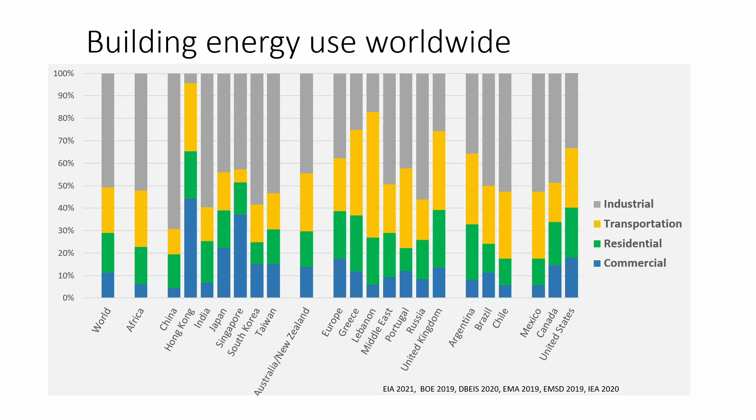But it varies depending on whether industry is dominating or whether it's moved away from industry and into more of service. In the US, we're kind of typical for what's going on. If we look at it from different parts, about half residential, half commercial in the US. Before the 2008 downturn, it looked like commercial was going to overtake residential, but that hasn't happened. Everywhere I go, there's still quite a few empty commercial spaces. This is still 15 years later after that recession.

But it's still there. If we wound the clock back to the 60s in the US, industry would be well over half of our energy. Residential and commercial didn't get to be this large until the last 20 years or so. That's where the growth has been. Transportation is pretty steady, about a quarter of the energy. The CAFE standards really make sure that our cars and trucks are efficient, and that's really had an impact.

I'm looking forward to seeing how this changes as EVs begin to make an impact. Where I live in Washington, D.C., EVs are now 15 or 20% of sales. It's just amazing the change in just a few years. It used to be up and down my street, it was all hybrids. Now it's all EVs.

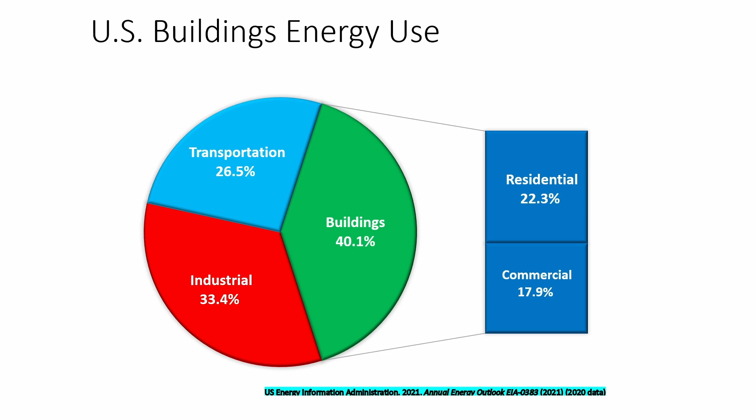So it is kind of interesting to see that change happening. The city encourages that. You don't pay any tax when you buy an EV in the district, which is worth a few thousand dollars. So they are encouraging that as well. Let me get this open.

This slide shows that what we traditionally think of our homes as far as energy use, the heating, water heating, cooling, appliances, cooking, things like that, are still there. But there are a lot of other things going on. In fact, a full quarter of our energy use now is other uses, all the little stuff that has crept into our lives.

I have almost 25-year-old twins, their birthday is next week. When they're home, I wonder why my Wi-Fi is really slow. Go on the router, there's 17 devices connected, all drawing these little bits of power. Even computers are now showing up in our residences at 1%.

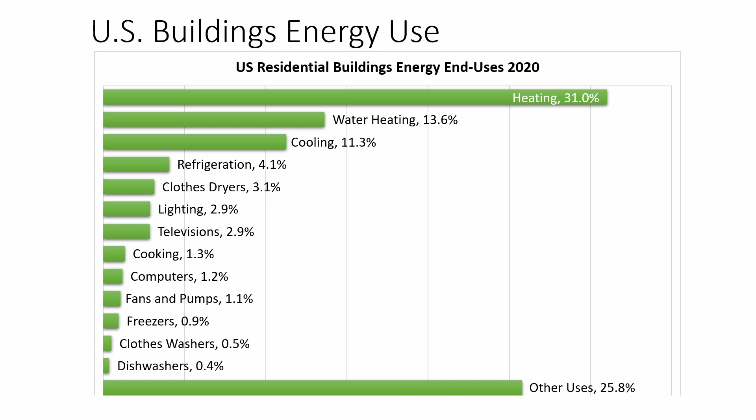So if we're going to deal with this, we have to deal not just with the top things, which is really what our energy codes deal with. We've got to deal with a whole spectrum of energy use in the buildings.

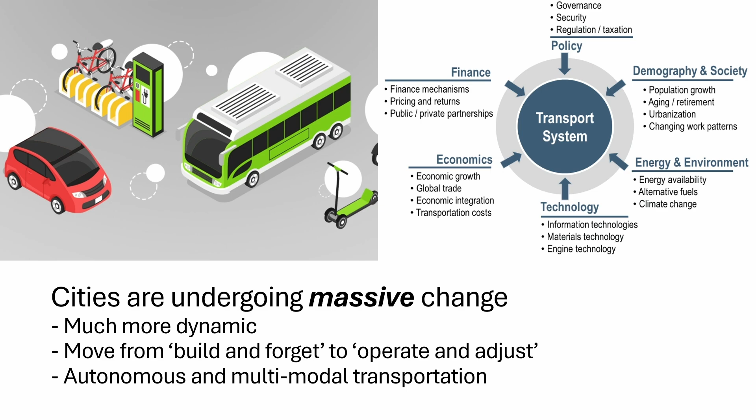We're seeing massive change happening today. You're seeing much more dynamic, much more interactive. People are trying to draw people back into the city. In Washington, D.C., a lot of office buildings are already being converted to apartments because they're empty - people don't go to them like we did just 5 years ago. Making that more interesting for people to live in, having them come to the city, has really been getting there.

Multimodal transportation - there are bikes and scooters littering my neighborhood. There are 3 different groups doing it, and whenever they run out of power, they just leave them wherever they are. But that sort of change, where we now have dedicated bicycle lanes throughout Washington, is happening in many places, and I think that's making them more attractive to live in instead of being so car-based.

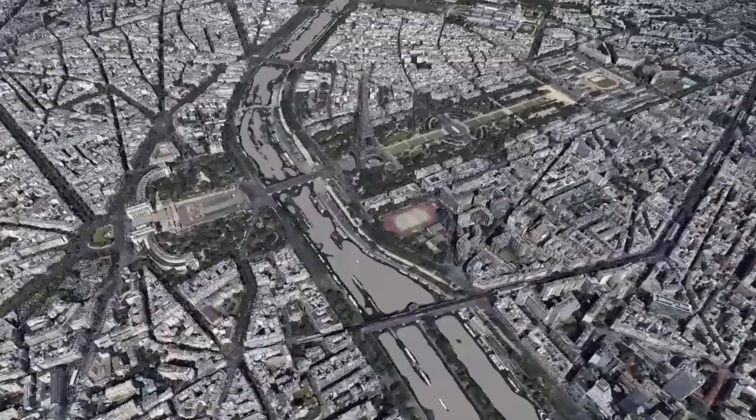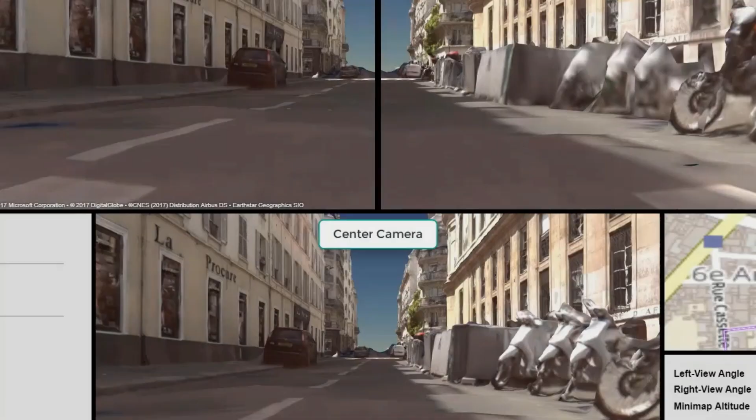This is Paris, where the Olympics were a couple months ago and the Paralympics recently. This is a model created by flying a small airplane over the city and taking tens of thousands of photos. Using a process called photogrammetry, that's converted into a model. Depending on how many photos, you can get incredibly accurate results down to a few centimeters or inches. This is the sort of thing you'd see from the Google cameras that drive through the city, but in places where there aren't many pictures, you get kind of weird stuff.

What this means is we can now capture an existing building pretty easily. That's kind of a cool thing. Photogrammetry has been around for decades - I have a book written in Serbian by someone who actually invented photogrammetry, maybe 100 years ago. So it's not anything new, but the power of it and the ability to create an image of Paris in a few weeks of computational time is really incredible and possible today.

And it's not a single source - you don't have to just take the helicopter or the plane and take pictures. You can do it from the street, however way you want to do it, in different ways. They can be point clouds as well, or reality mesh, which is what I was just showing you, 360 images, even obliques capturing that data. So it's a way of capturing many pieces there.

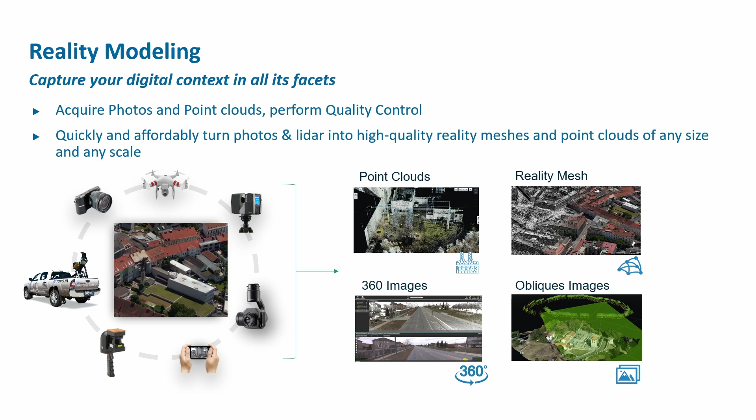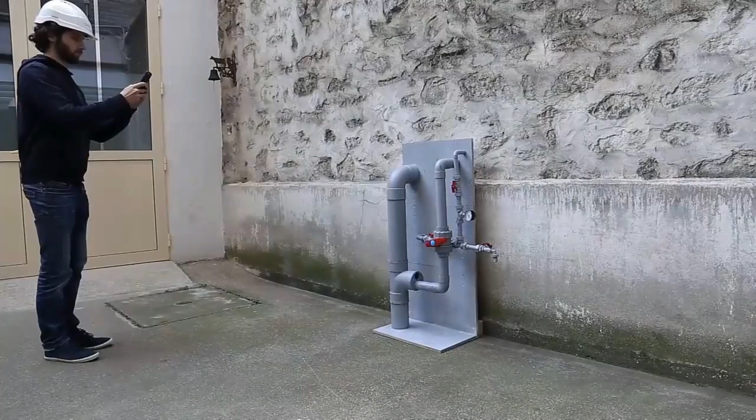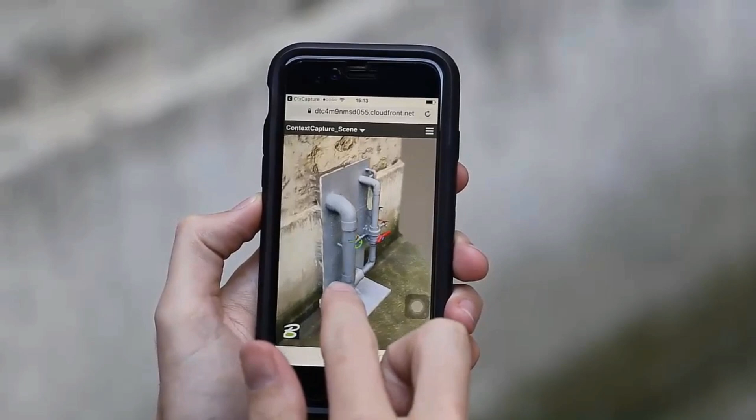LiDAR is one of the most powerful possibilities of adding this in, because with LiDAR you can get down to millimeter accuracy. Here's an example: a colleague using one of our apps on a piece of plastic pushed together, not a true pipe. He sends a bunch of pictures up to the cloud, as long as they have at least 50% overlap, and you get it back. You can take measurements off that - it's that accurate. That's one of the key cool things it's been able to do.

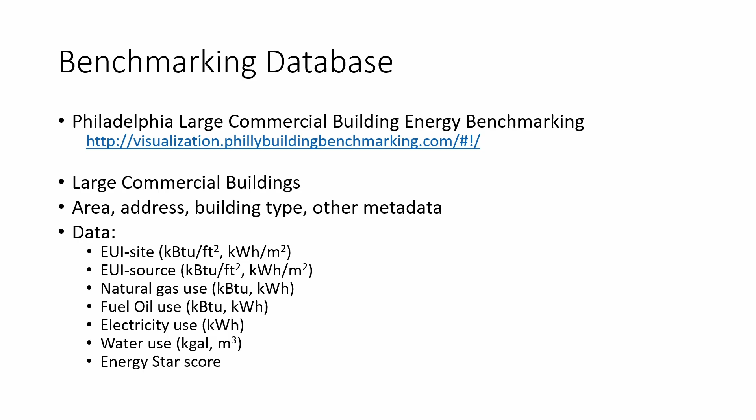Philadelphia, like Chicago and many others, has been doing building benchmarking for over a decade, requiring building owners to submit their energy and water bills and other information. For Philadelphia this looks like a database where you can get information about energy use. You can do the same thing in Chicago for various buildings, depending on the city, for buildings 50,000 square feet or larger. Some of this has been overtaken by building performance standard work, but it's still ongoing. If you look at Philly, their database is just kind of a flat file available online, but it has a lot of information.

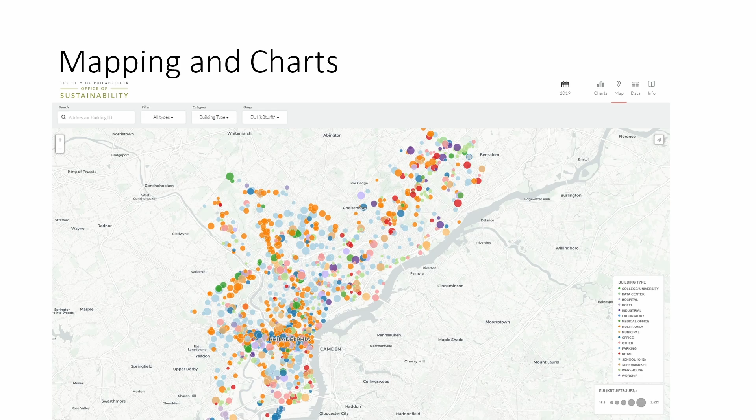Their visualization goes to the point of showing the mapping of where the various things are. But what we were able to do is take this model of Philly and start applying the building information on top of it. So what you're seeing here is energy and water intensity, green up to red, showing the energy intensity of that. Pretty pictures - this was kind of cool when we did it, but what use is it?

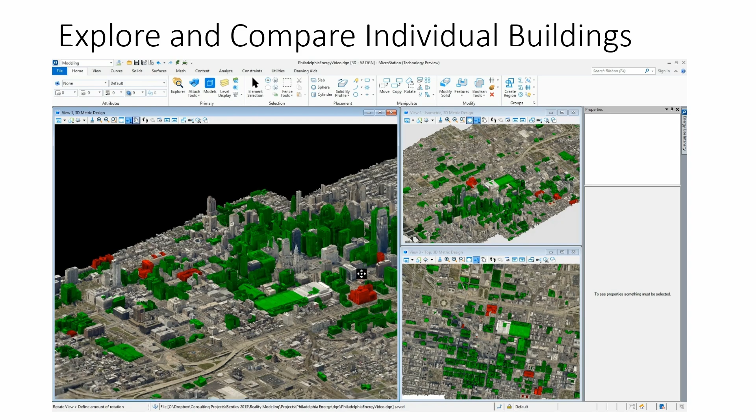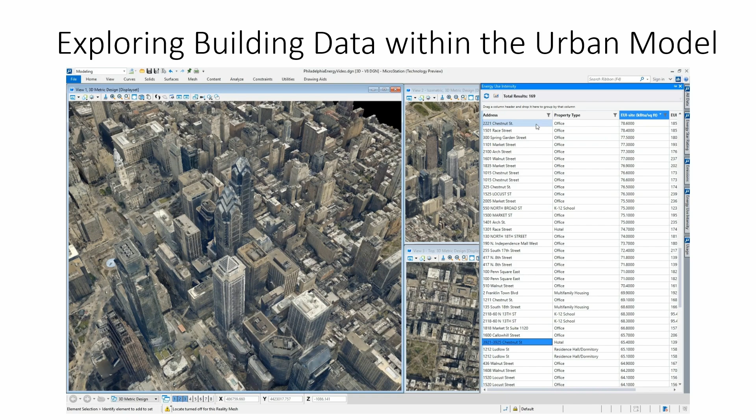That's where it comes in. Now you can start to use it as a way of identifying outliers, maybe the buildings you want to work on first. You can begin to look at individual buildings and pull them out, but there's data underlying this. All that data sitting in the Philly database is now part of this data set. You can sort on property type, you can sort on energy use, and see the tabs down the side - that's all the data associated with that. I think that's where the power of these reality models begins to show. They picked a particular place, a hospital, so it happens to be bright red, very energy intensive - not surprising. So this is a way to use this going forward.

I'll show you another example where they did this specifically in India for an entire town, not just the larger buildings as they're doing in Philly.

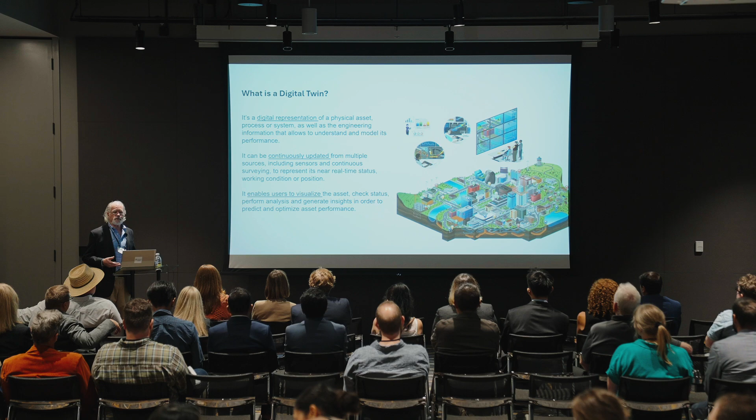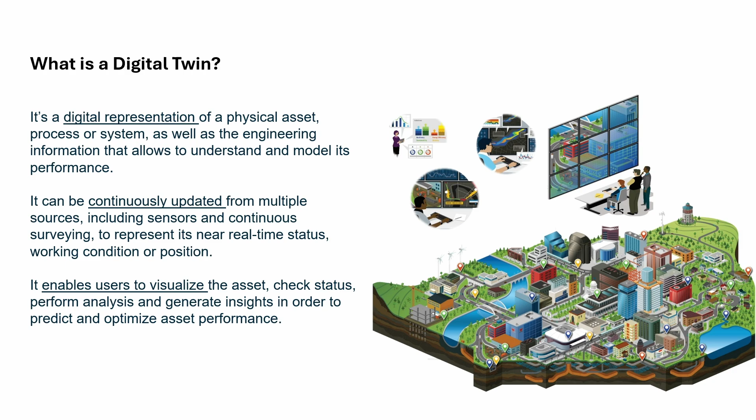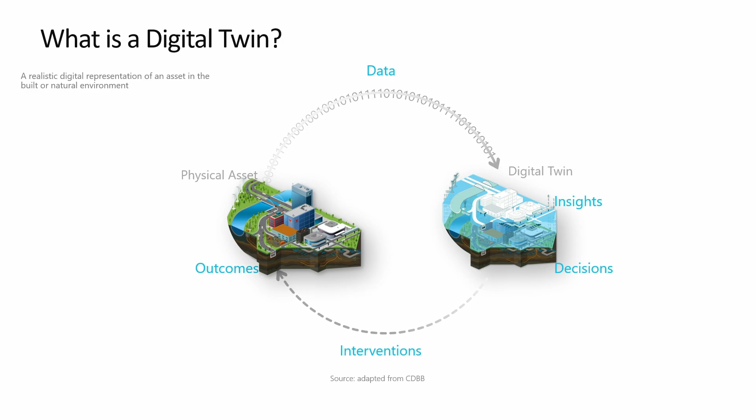So let's talk about the next version of a reality model, a digital twin. Digital twin isn't just a building thing, it's industry-wide. There's actually a digital twin consortium, with people from Microsoft and a lot of other places you wouldn't think digital twins would be useful. But all it is, is a digital representation, a digital modeling of what's going on. The engineering information isn't a single source - it's federated data sets that you can bring together in many ways. It's a way to visually look at what's going on in the building, and you can generate insights from that. So physical asset data is transferred into a model where you can begin to look at insights and decision-making based on the information you have, and come back to interventions. And it's also live - that's the idea, not just a static model. The Philly model is a static model, but the idea is to have something you can use throughout the life of the building.

It can be used starting from conception, design and engineering, through construction and commissioning, as well as operation and maintenance, so you can use that throughout the entire life cycle.

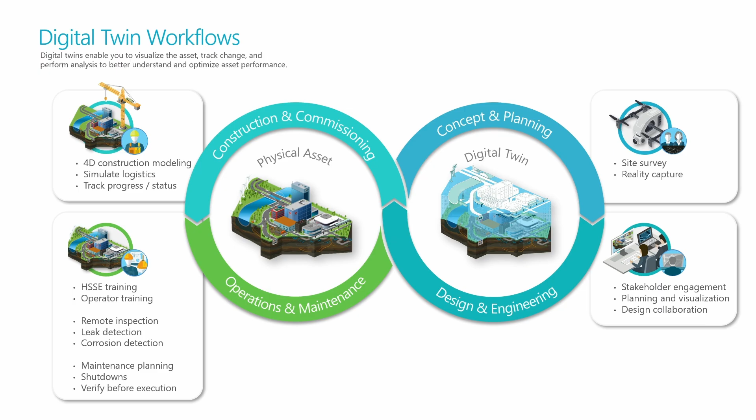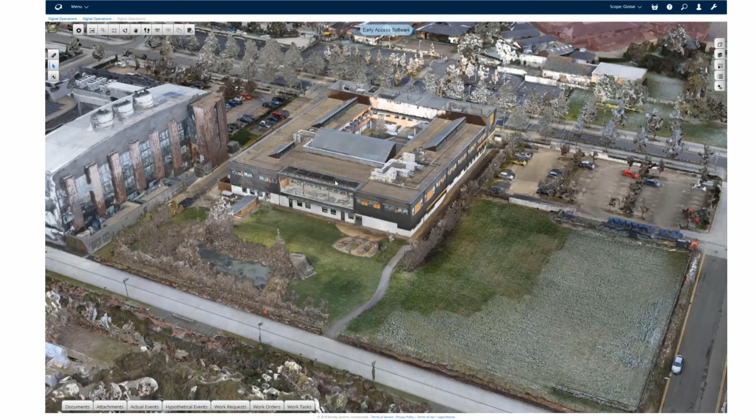If you're starting with a BIM model, that makes it pretty easy to deal with. If we look at this from a building digital twin side, you can begin to see how this is captured. This is Cambridge University, and that building in the center is the one we're going to be looking at. This is the West Cambridge campus, so it's not the old stone buildings, it's a new campus that's been built over the last 20, 30 years. That building in the middle is the Institute for Manufacturing, one of the partners.

So what they've done is take photogrammetry for the outside to get the model. Photogrammetry works great on exteriors, but it's really miserable if there's glass or white surfaces. So guess what, inside of buildings it doesn't work very well. But that's where you can use LiDAR.

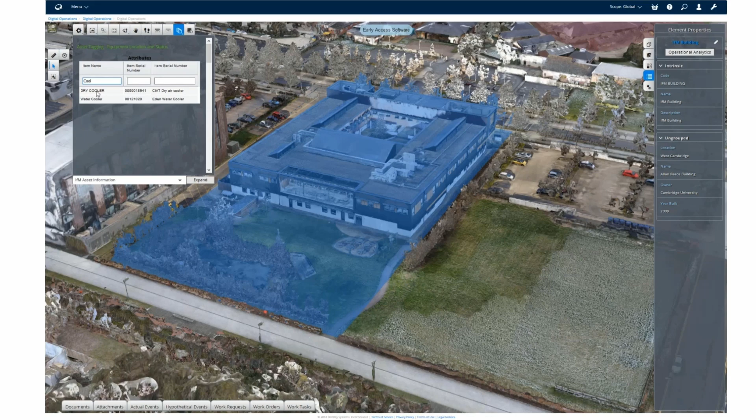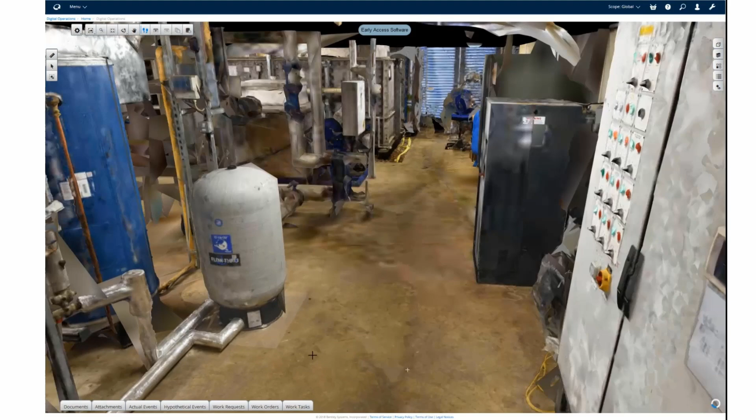I'm going to let this play. Now we can begin to zoom in, and again the quality there lets you look at this. I can actually make it look like we're going inside, and once I get inside, this is a LiDAR model. You can see the quality, you can read dials, you can read signs, you can read all sorts of information going on through there. So this is a very powerful tool for doing that, and the LiDAR accuracy is very, very tight.

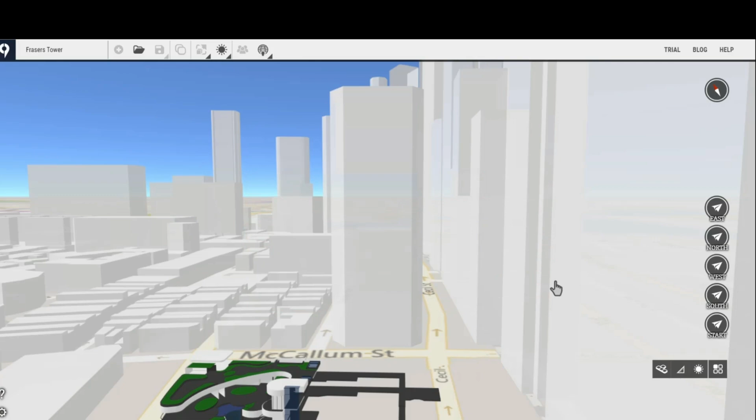On the other side, where we are working with a BIM model, this is actually Microsoft's Southeast Asia headquarters in Singapore, and they occupied the 9th through the 14th floor. This is the BIM model. The building's actually constructed at this point, but the idea was to be able to use this as a way to look at data, what's going on.

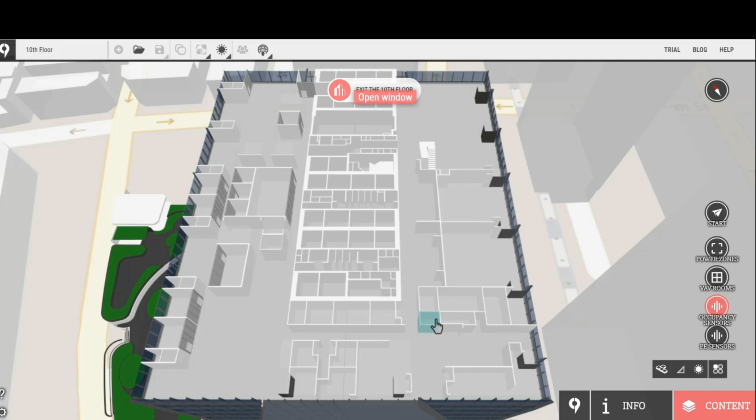So you see measuring one space, you can see what the temperature's been doing over the last day. These are in Celsius, which is why they look so cold. But also other information, trying to look at sensors, whether a space is occupied. Probably not trying to use that to see whether people are actually bothering to show up, but you can see whether conference rooms and other things like that are occupied throughout the day.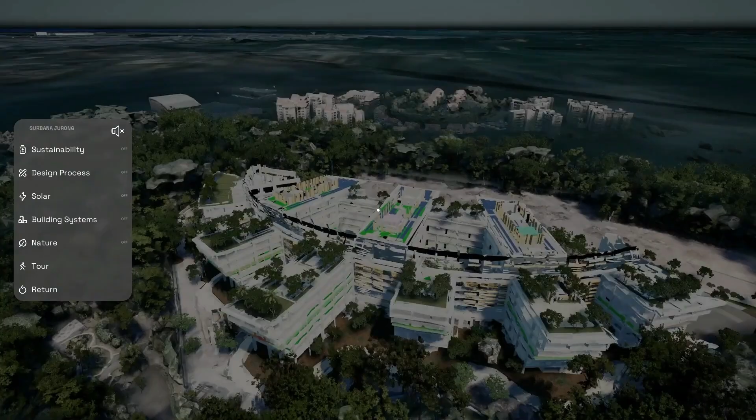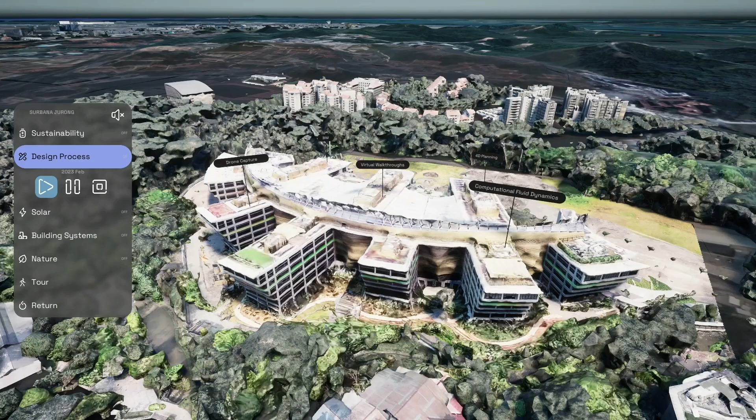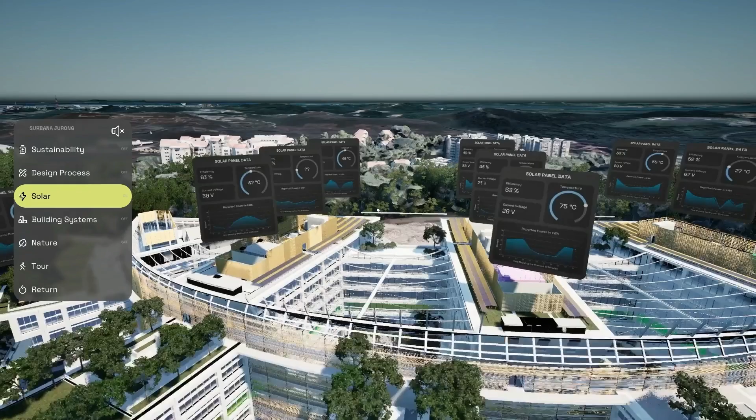To another extreme, this is also Singapore, and this is a project showing how you can use the digital twin throughout construction, and then even once it's completed and all the analysis is done, you can begin to look at information. There's solar panels on this, and what is the contribution from that in terms of a particular day. You can look at individual building systems, you can go into a particular place and look at the occupancy like we did for the other. This also has green roofs related to it, and you can use it to have a tour for this particular place. This is a big developer in Singapore, and this is one of their headquarter buildings.

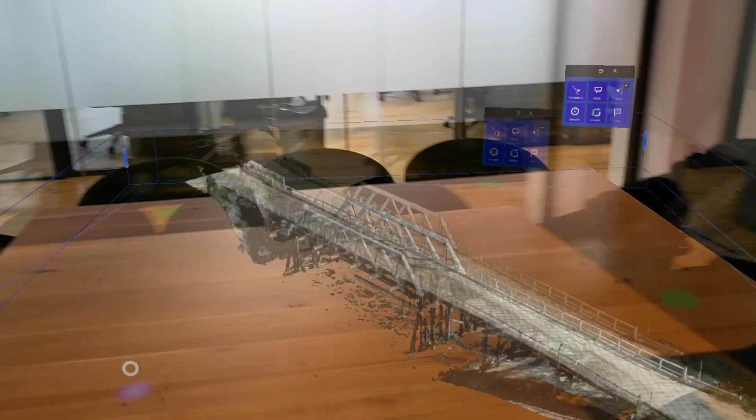So that's buildings. We can also do this on the transportation side, and I think the power of that's already being seen. Here's an example, this is using VR goggles. This is what you would see if you were dealing with it, being able to look at a bridge and inspect it.

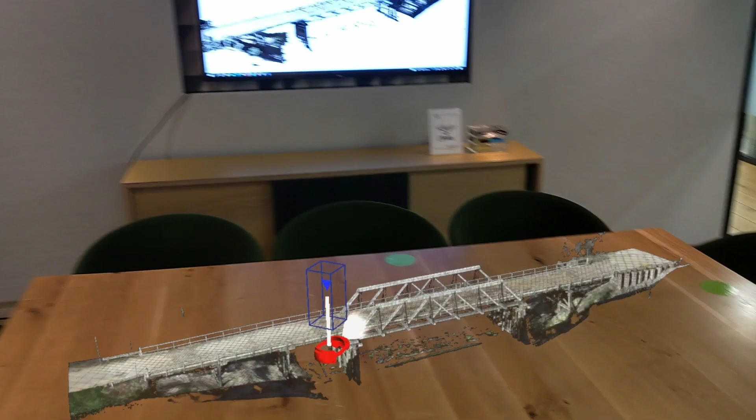One of the things we have is aging infrastructure, everybody says, and they point to bridges that are going to fall down. One way to address that is to go out and inspect them. Well, to inspect most bridges you had to have somebody physically hanging off the bridge, looking at the infrastructure to be able to do that. Now, if I can use a drone to create a digital twin model, I can go further and look at that in more detail, so that I can actually see what's going on in the comfort of my desk instead of somebody on a rope.

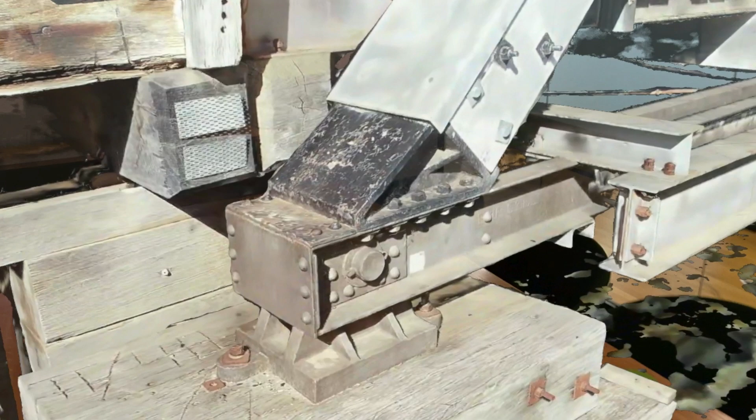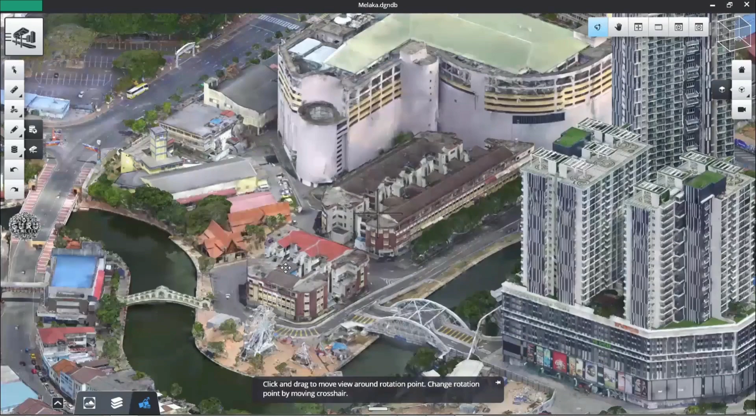You can add cars, simulating how that works, and seeing if that's going to be a problem. Another place in Malaysia where a digital twin has been created lets you look at individual bridges and see how they're particularly working.

Looking at this bridge, we can see whether it's having any issues. This is a cracking defect at a joint, and all the drawings and specs are really at your fingertips. You get a load assessment based on any damage that's there, images of that, and you can use AI tools to decide whether it needs to be repaired or is just cosmetic.

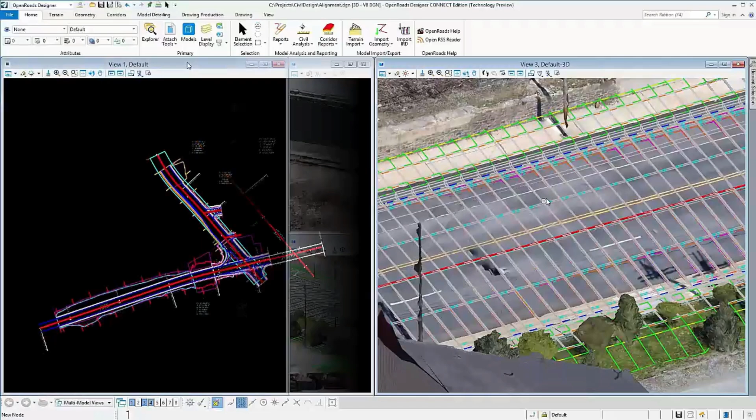Another way is to use the digital twin to feed this in. Here we have an existing roadway that's about to get repaved. They bring the model across — sorry, this runs a little long.

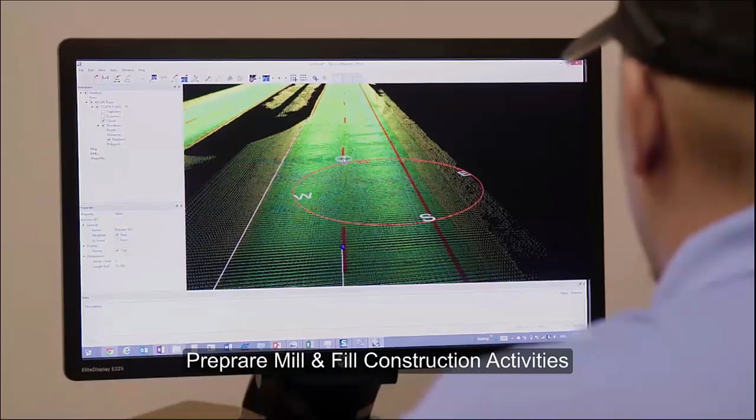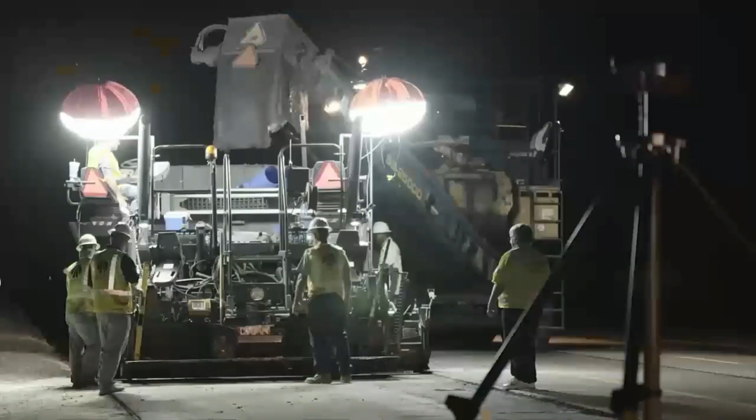They look at what's actually happening, what's there today versus what they want to do. He brings it in, makes adjustments in the height of the roadway to take out some of these bumps, and that's fed directly to the machines doing the repaving, so they'll know from the GPS where they need to cut deeper or less.

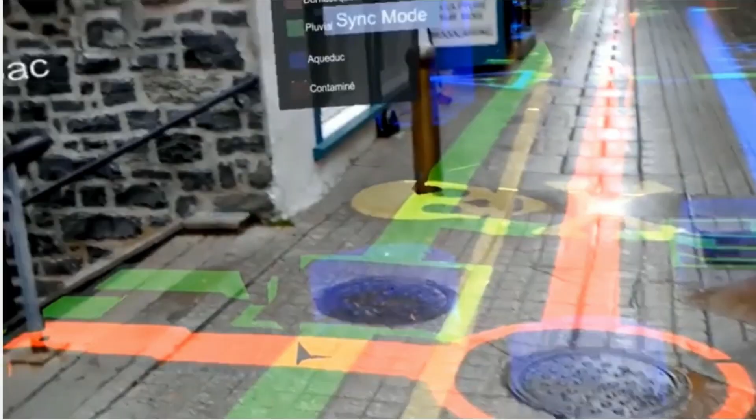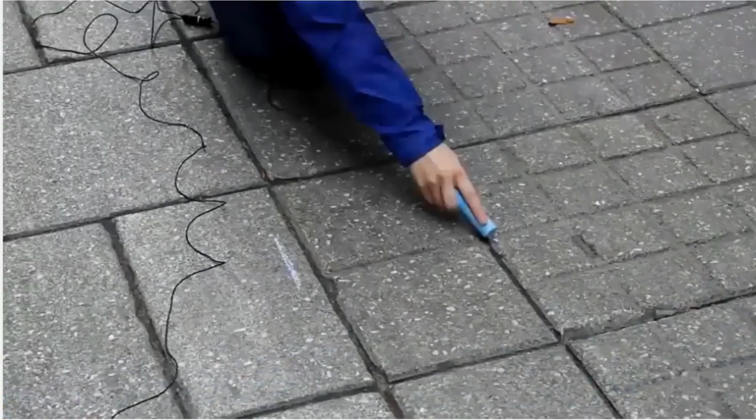There's also infrastructure, stormwater and water, that's pretty invisible. Using AR capabilities, you can show on the surface what's actually subsurface, so you're able to look at essentially a diagram of what's going on and identify where things are without having to dig up the whole sidewalk to find something.

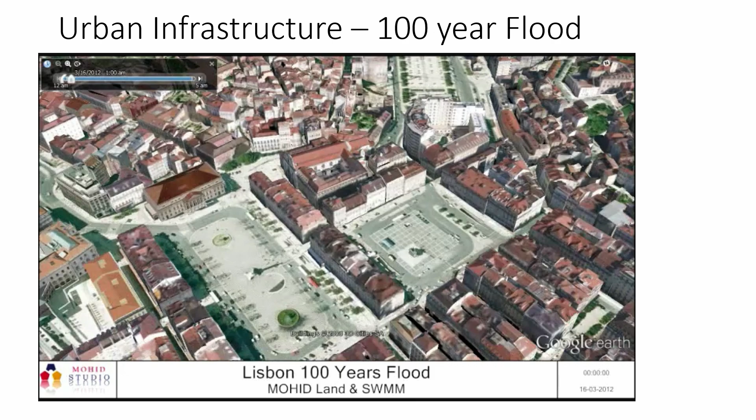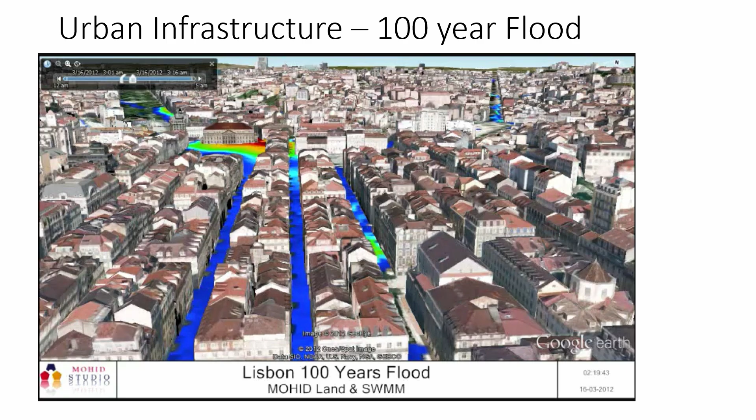Other things, because the digital twin is accurate, we can begin to look at other scenarios. This is Lisbon in Portugal, showing the impact of a 100-year flood in the historic area. There's just not enough ground cover, places for water to seep in, so in those particular areas they are looking at real problems — the stormwater system just isn't equipped to handle that much.

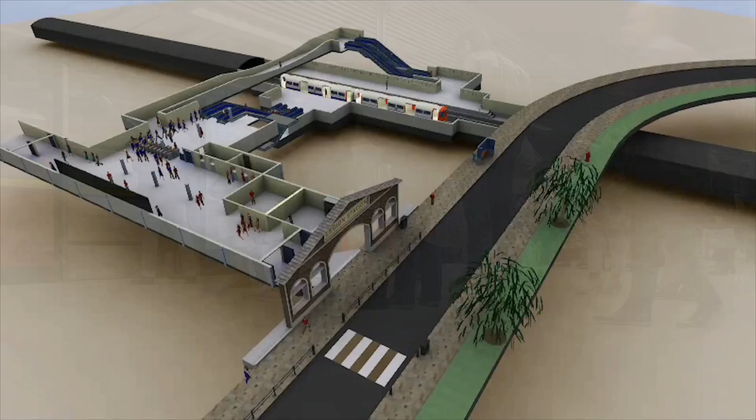Also, agent-based simulation, where you simulate people moving through a space. It's kind of interesting — there are cultural differences in how people stand together and group, but the models can take that into account.

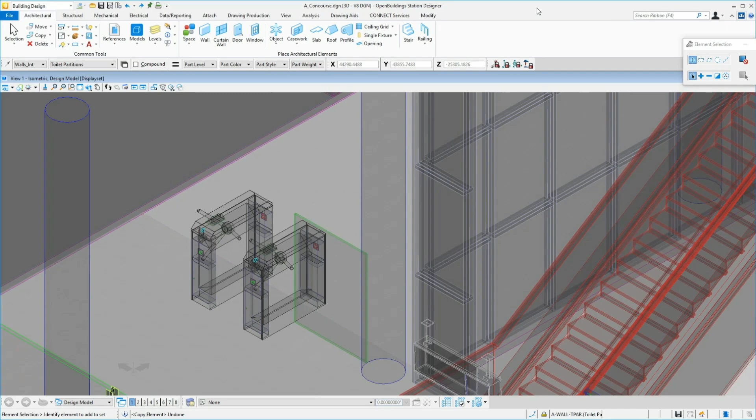So we can look at airports. This is an example of a BIM model for a subway station, using agent-based simulation. They can see there's a problem — only 2 turnstiles. They come back into the same model, without leaving the BIM model, and add in a couple more turnstiles, then resimulate to see what happens.

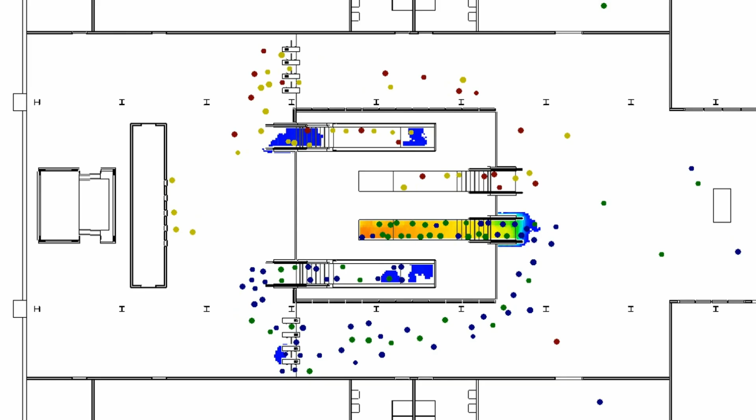And now we've solved the problem. So rather than waiting till we're done, we can look at that early and use agent-based simulation. These tools have been used for years.

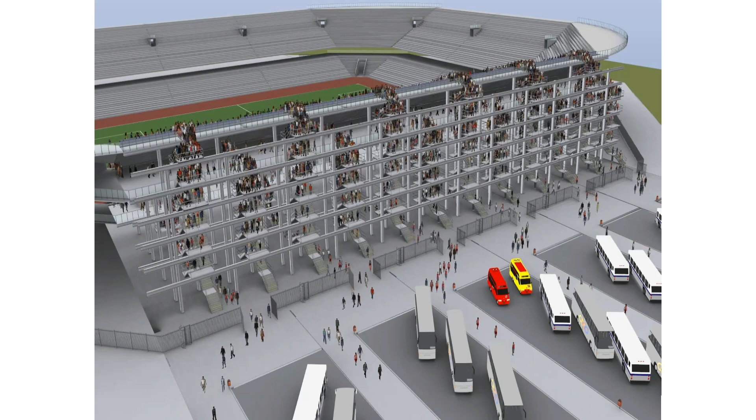Football stadiums throughout the world, whether American football or soccer, use these. We need to know how quickly we can get people out of a stadium — there are tens of thousands of people in there, so being able to do that is really critical. Knowing from a cultural standpoint how people interact, you can ensure you can get people out of the stadium in just a few minutes.

So we take all this together, and now we have an urban digital twin. And so what that is, taking the information that we have for existing as well as new.

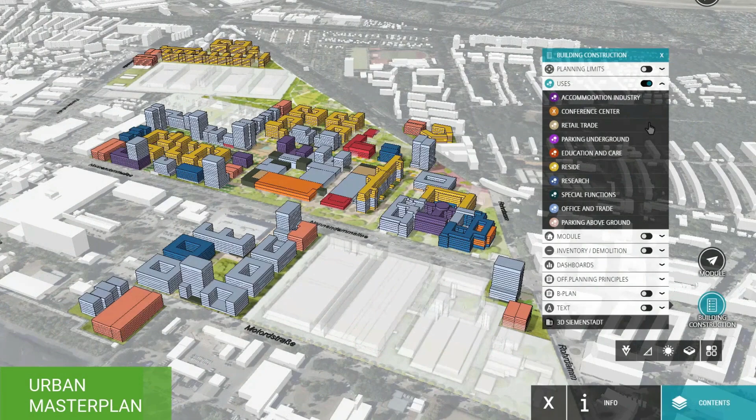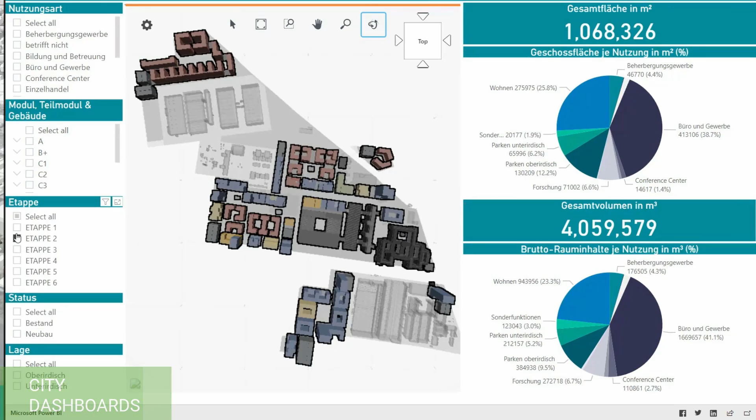This is a large German engineering company, and they've been on this site for 120 years. They've now created a digital twin of this to be able to look at all the aspects of it. They can look at noise maps in the neighborhood from traffic and train and other parts of that.

They also can actually look at, they had an architectural competition for this building, kind of center bottom there, and being able to look at different versions of that, seeing where people, what they look like in context.

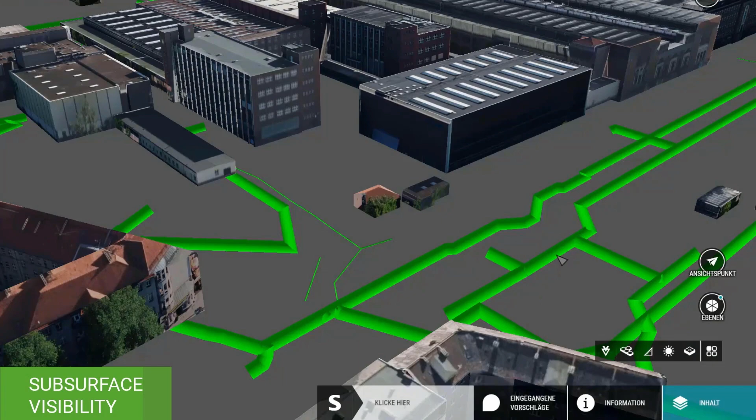Now showing some of the sensors that are available here, looking at water flow, and also looking, you can kind of make the ground transparent to begin to look at what's underground, again, for that whole campus. In this case, have been able to tie in at a particular point the inspection that happened, so that there was a visual aspect of that as well.

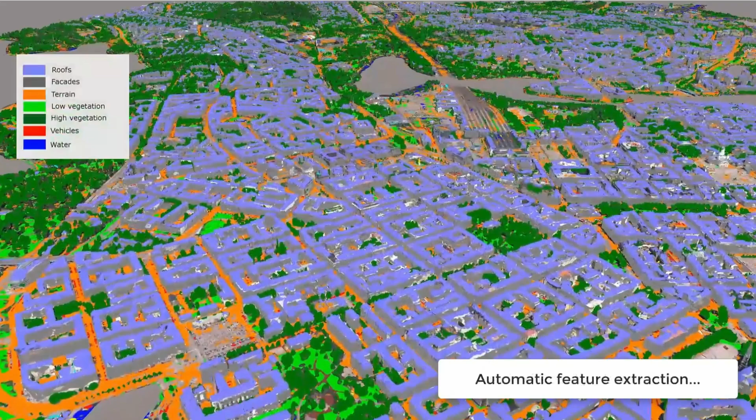It's right at sea level. You see we're seeing flooding here if we get any aspect of that, and that is the historic core of the city. But this is their third generation model. This is the 26 square kilometers of kind of the historic core of that, and being able to look at it.

Now they've used deep learning, machine learning in this as they're creating the model to try to automatically get what each of the elements are. Is it a roof, is it a facade, et cetera? What are the bits and pieces related to that? And so they're being able to start to look at that in more detail. That was a good first start.

But they've already thought about what can we do with this digital twin? And this is from their website. So carbon neutral, smart business, marketing, tourism, city events, planning, the whole range of things. And if you see a red dot, they've not really done anything with the model to do that. But you can see the green dots mean that they're actually already beginning to use that in the city as they move forward.

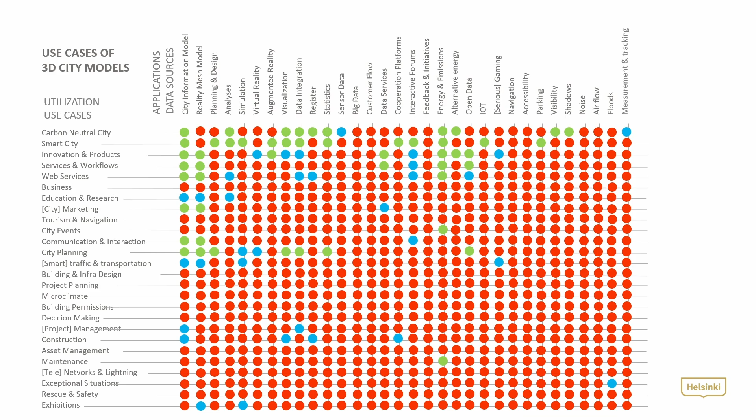So the city that kind of took it a bit further, this is Ahmedabad, Southwest India in Gujarat, if you know your geography. And this is actually a kind of a test. This is about a 1 by 2 kilometer piece where they flew drones, collected the data, and began to look at the information they collected.

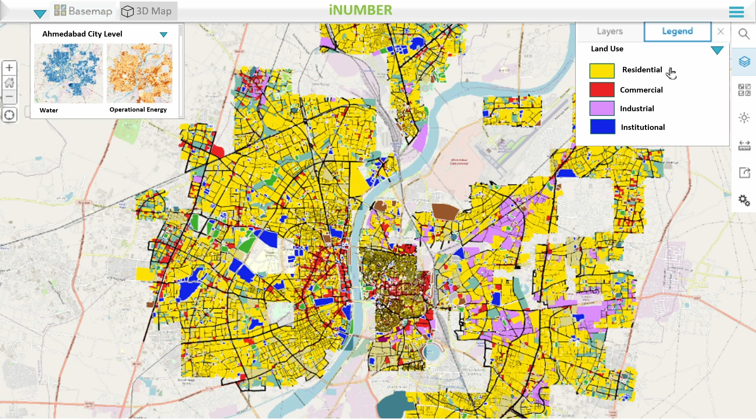Mixing that with land use, in this case just showing the residential, commercial, industrial areas. The center part where it looks the most dense and different, that's the historic part of the city. But they're able to take that then and start to look at other pieces of it and see what's going on.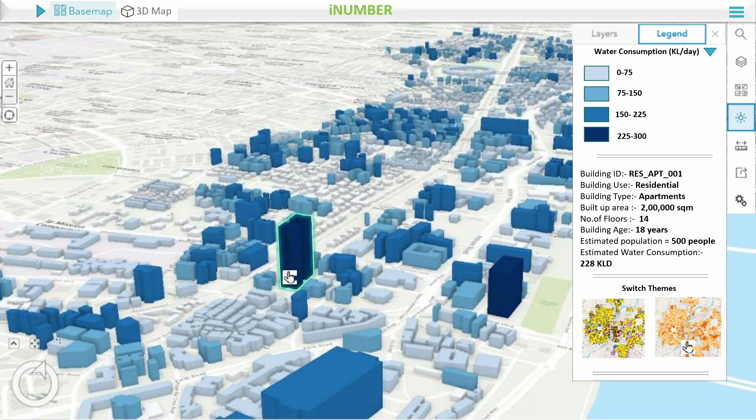These, but having this, these are extrusions, these aren't actually the model that you saw earlier. They began, you can look at, this is building type again, but now begin to look at water consumption by building. Of course, a big building is going to have higher consumption, but also looking at energy and seeing that.

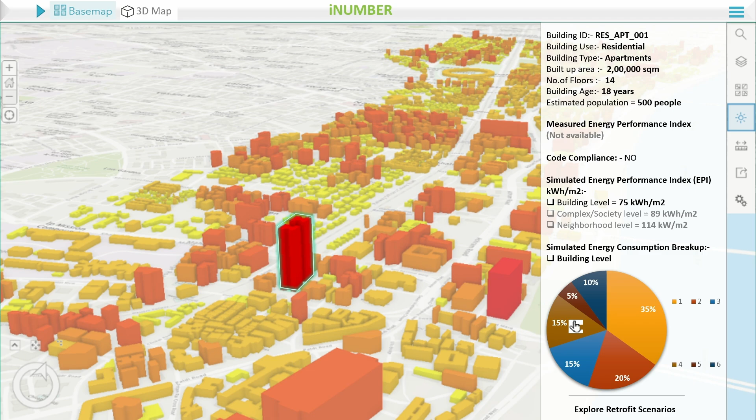They created an Energy Plus model for every single building in the city for this, which was pretty amazing. Partly they want to look at what are the aspects of that can help them identify retrofit opportunities within the city.

ECBC is their National Energy Code, and being able to look at that. So you can see which ones, the baseline scenario where we are today, but then where we could be if we started doing some retrofits. Pretty powerful piece.

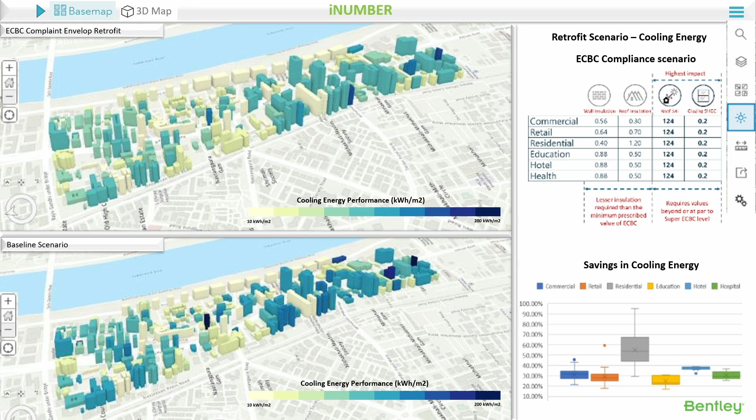I talked about Helsinki being 26 square kilometers. This is 240 square kilometers. It's a huge city. We're continuing to work with them today on this. We're looking at some new opportunities, looking at resilience, particularly as they're expected to be kind of in the path of some of the extreme temperatures that have been happening this year and past few as well. So they're looking at a UN project to work on that.

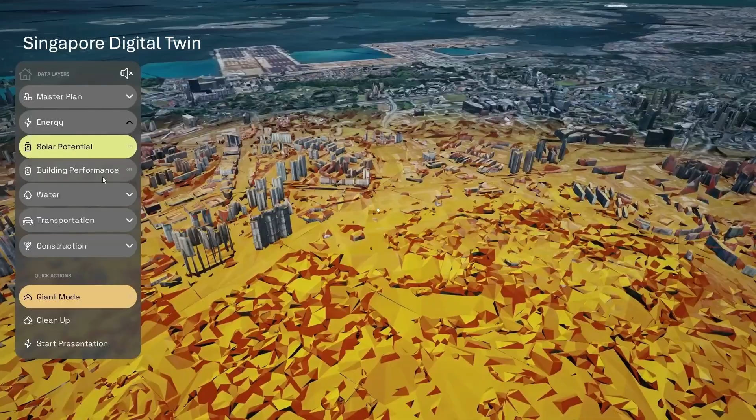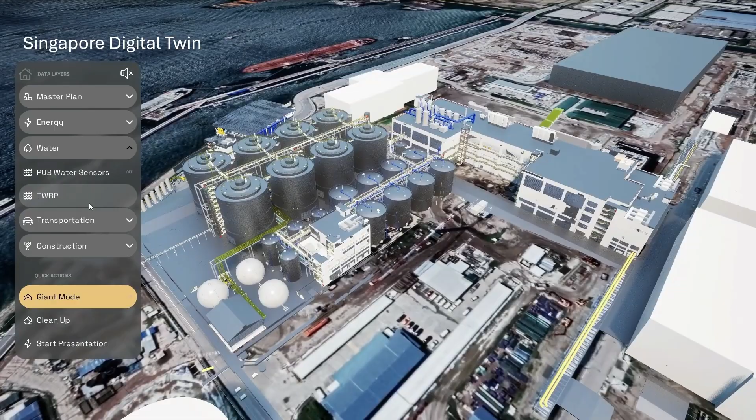This is the only countrywide digital twin I'm aware of, but it's Singapore - an island or series of islands, so it's really a key thing there. You can look at it: we looked at the master plan, energy intensity, solar potential throughout the city, building performance where the big energy users are - I don't think these are area normalized. Also water systems, demand, and transportation systems. So lots of possibilities there.

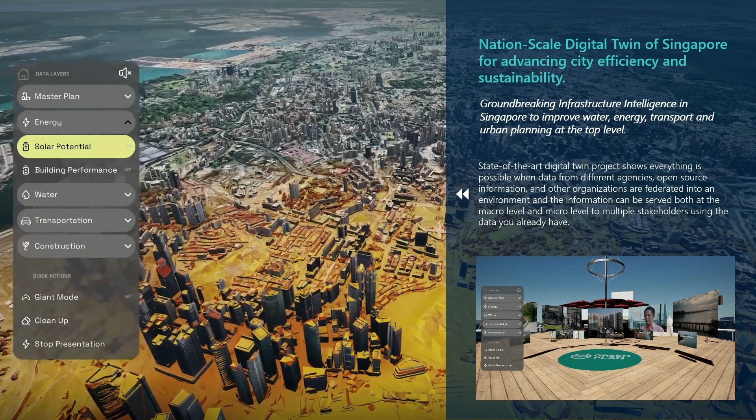So Singapore is using this. This is an open digital twin that they're using, trying to begin to look at how they can use that to really shape the city, the country, as they want to go forward with it.

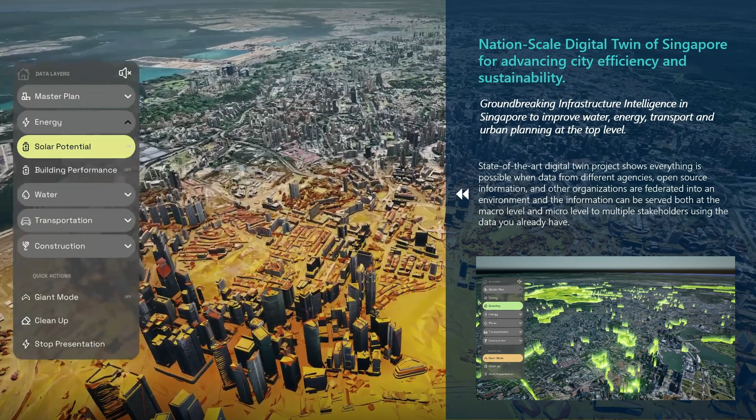Actually, I think that's one of the things we're seeing early, the use of the digital twin - just on the transportation side of things, where sensors and cameras are finding traffic jams, they can begin to direct people other directions or change lights in real time to deal with that. So that's kind of one of the interesting things - it begins to empower people to do more.

We can simulate and monitor, make adjustments, immersive visualization - it's a lot easier to explain to somebody who doesn't know how to read drawings and plans if you show them visually within the space they're working in. Analytics can be applied directly in the model. AI, machine learning, all the different tools that are emerging are really becoming quite powerful. And I think the key thing is decision support, so that if I need to make a decision, I can look at various alternatives within the model.

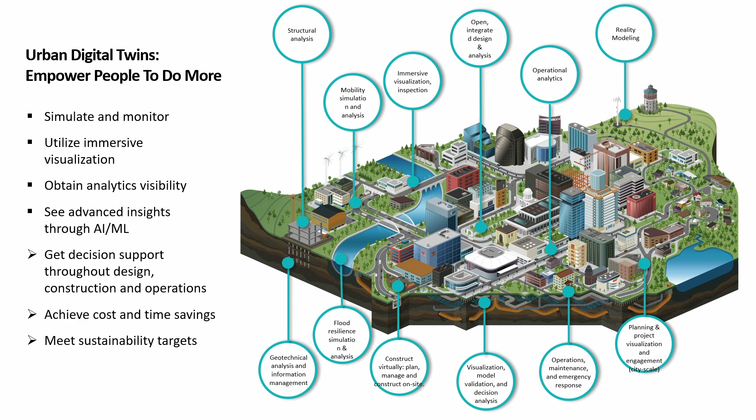Cost and time savings is also a big part of that, and sustainability. So we're trying to look at a bunch of different things, which together is a lot - it's just very difficult to be able to look at everything we're working on there.

So, from urban planning, we looked at sustainability, planning coordination, efficiency, citizen engagement - I think that's where we're going to see a lot of this early. Housing affordability, urban renewal, accessibility.

We worked with a town in Iowa, and they're required by ADA to have curb cuts throughout the city, and they had no idea what they had. They decided it would be easier just to make a twin of the city, and found out where they could actually plan and work with that.

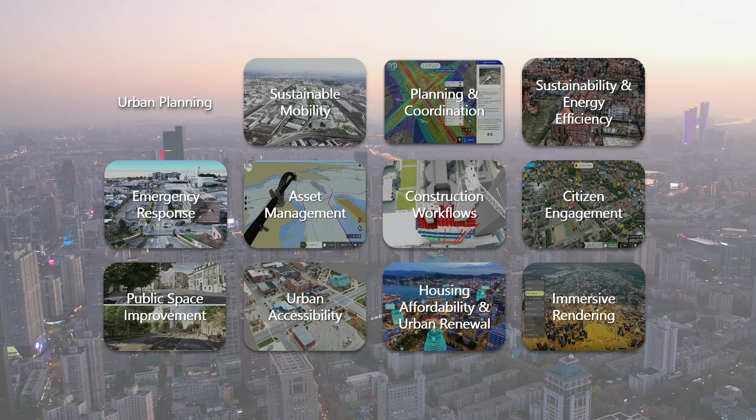So there was public space improvements, kind of a big thing happening globally. Asset management, construction workflows, all various things here.

Digital twins really make it easier to understand our buildings, our communities, how they interact with the environment. It's federated data - it's not one source, it's not one platform, there are multiple out there, so you're not tied to any one vendor. That's kind of one of the key things. But photos, point cloud, mesh, all the things I've been showing you here are all possible to put in the same model, and that's kind of one of the powers of digital twins.

As you get new buildings in place and you have BIM models, you can place them right in there, replace that. So it's kind of a really powerful means of getting a model of what you're trying to work with.

It is a holistic view of what's going on, so you can look at risk, resilience, and sustainability at the individual building level, which is, I think, where a lot of the building community works, unfortunately. But now we can start to look at community, city scale, even whole country scale, at least starting with Singapore.

And it's not a single discipline - engineering, civil, mechanical, all the electrical, all that infrastructure, as well as the building and the urban planning. One of the things that's happening that makes a lot of this more powerful is 5G deploying, being able to get real-time feedback from and to sensors and being able to look at that.

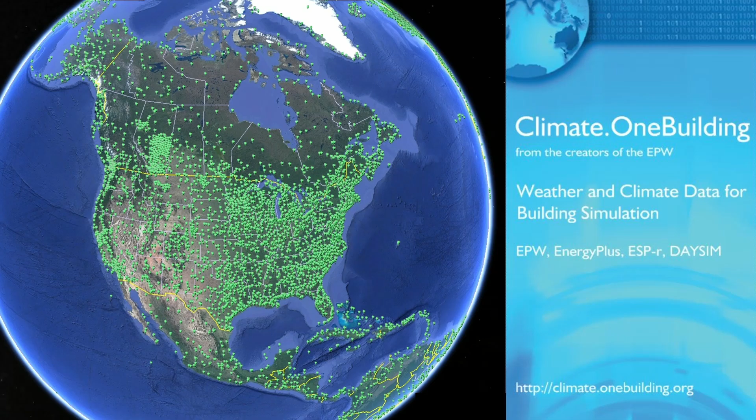Other thing, I'm a building simulation guy. That's where I got my start, where I've been doing it for a few years. There's a data set that's got about 3,000 locations in the US, called Climate.OneBuilding, if you're interested, all the data are free. This is not part of my Bentley role, this is my free time role. We just published a data set with data through 2023 up there, so you have the last year's data availability for that if you're interested.

So with that, I'll take any questions.